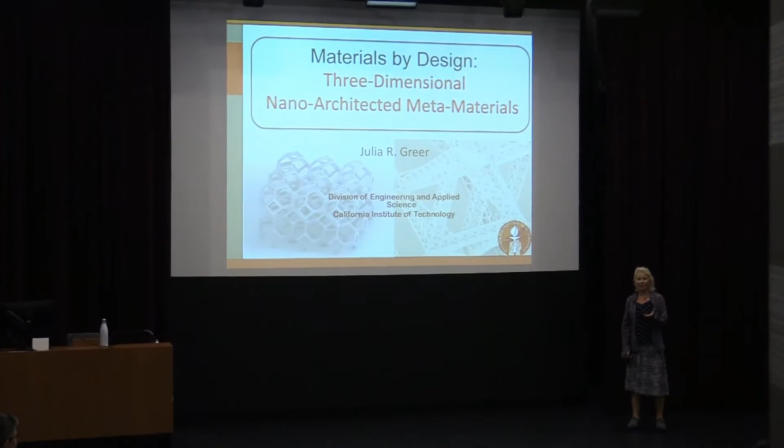You've been staring at this title for a while, so 'materials by design' probably makes sense, and then you look at the second part of the sentence, '3-dimensional nano-architected metamaterials,' and you're wondering, okay, I think maybe I understand each one of these words on its own, but why they belong in the same sentence might be a little less clear. So the goal for today's talk is to convey to you why it is, in fact, appropriate to put them all in the same sentence.

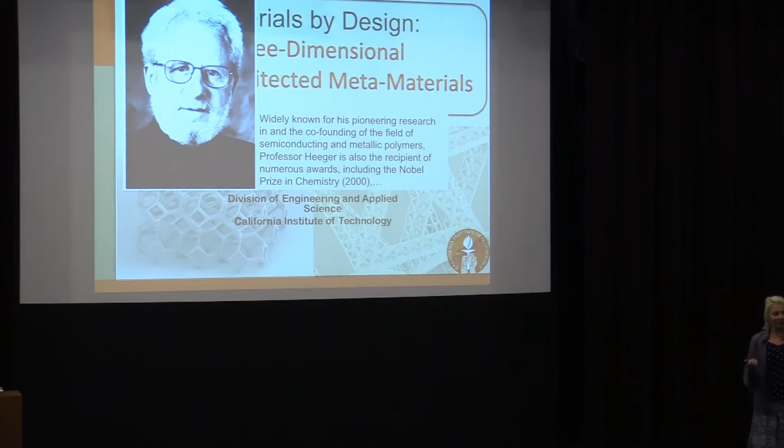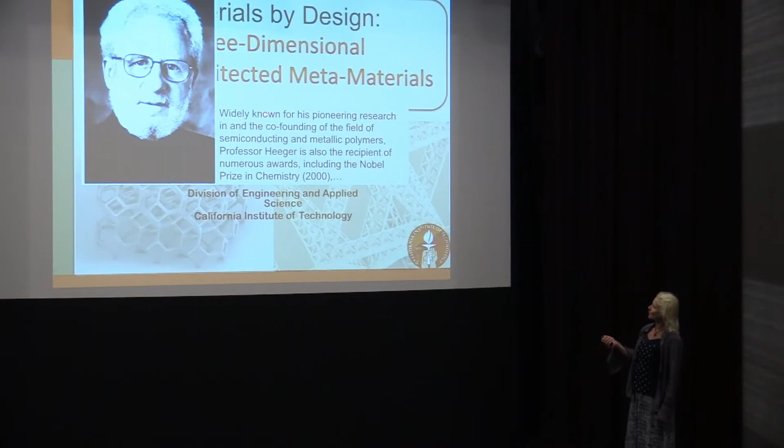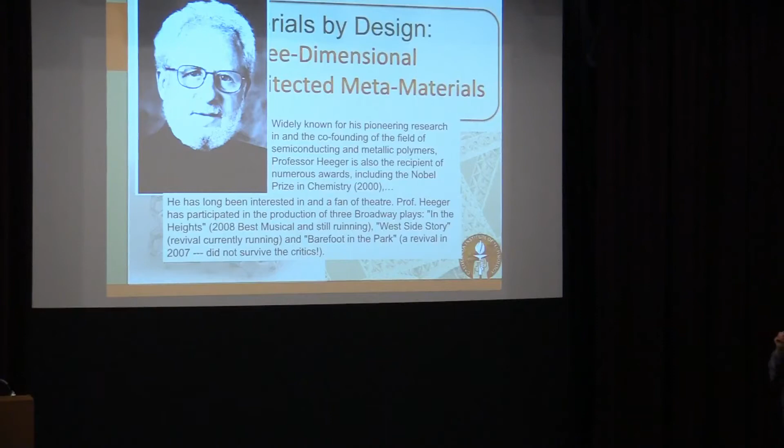I'm here because of receiving this award that Alan Heeger endowed. So what I'm showing you is a picture of Alan, and of course he's widely known for his pioneering research on various types of polymers. So I will tell you a lot of stories about polymers today. But the lesser known fact about him is that he's actually a huge theater fan, and if you love theater, you can see that there are all these plays that he's been in.

And so I'd like to begin, I guess, to motivate my talk by showing you this, inspired by this theater situation. So I also happen to have a theatrical play.

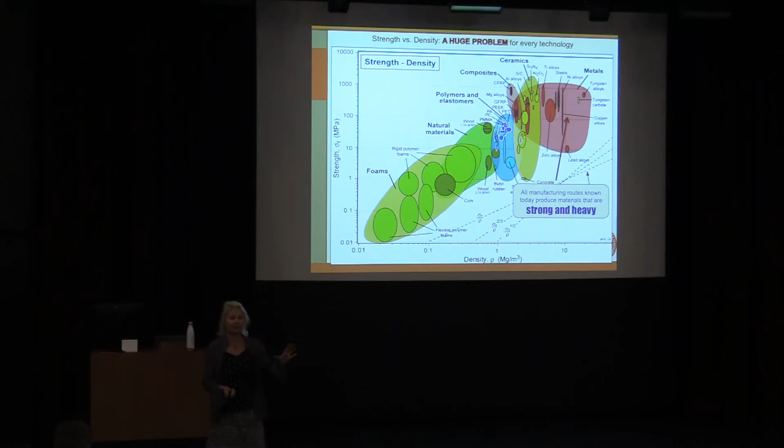Look at all these colorful domains. These represent all the materials that we know how to make today. What comes out right away is that we are very good at making materials that are simultaneously strong and heavy, or lightweight and weak. What we're not so good at is hitting the so-called white space, making materials that are relatively lightweight, at least the relative density is low, and mechanically resilient.

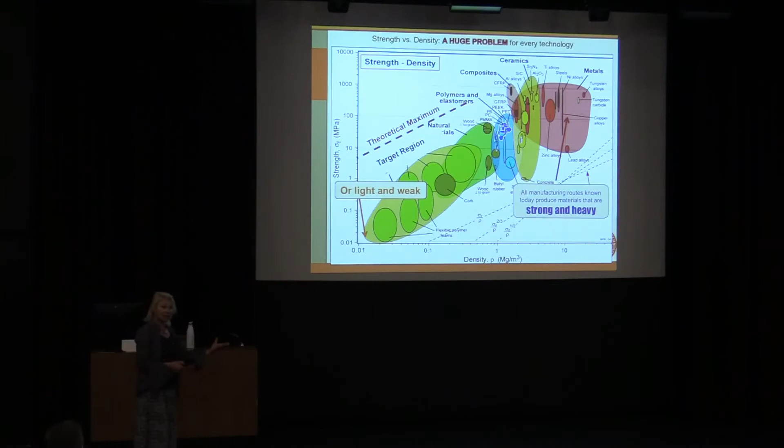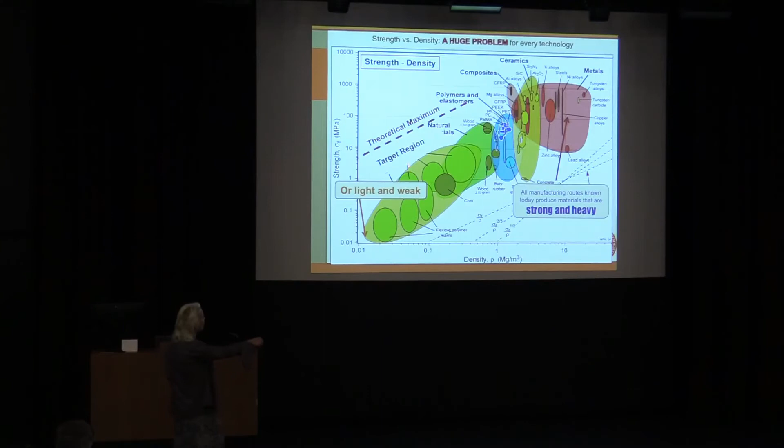So how do we hit this white space if everything that we know how to make today is already here? I'd like to point out that this is a log-log plot, so even a modest increment within this space already represents a substantial change. It's sufficient to get even over here to have an effect.

Well, the way we do it is we draw our inspiration from what exists today. When you look at the Great Pyramid of Giza, this is the largest stone man-made monument. You see that it stands about 150 meters tall, and it weighs nearly 6 million tons. So that's very, very heavy, right?

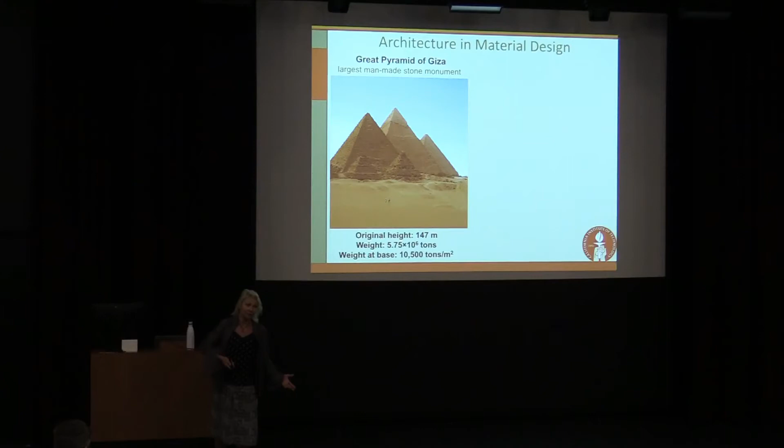Now, in contrast, the Eiffel Tower, and maybe some of you have been to some of these things, stands twice as tall, and weighs 1,000 times less. That's 3 orders of magnitude less. And it's just as mechanically resilient. They're both still standing. And I suspect there were a lot fewer slaves used in the construction of the Eiffel Tower.

So what that tells us is that we can make structures that are mechanically resilient without using quite so much material, right? So we began this research by collaborating with HRL, which is actually not too far away from here. And so what we made is a nickel microlattice.

What you're looking at is the world's most normal dandelion. There's nothing photoshopped about this picture. This microlattice is made out entirely of nickel. And you can see it's hardly perturbing the dandelion at all.

It's exceptionally lightweight. In fact, if I were to hold one of these in one hand, and a feather in the other, and release them at the same time, the feather would fall down faster. It's just exceptionally lightweight. But what we want is not just the lightweight, we want a combination of lightweight and strength.

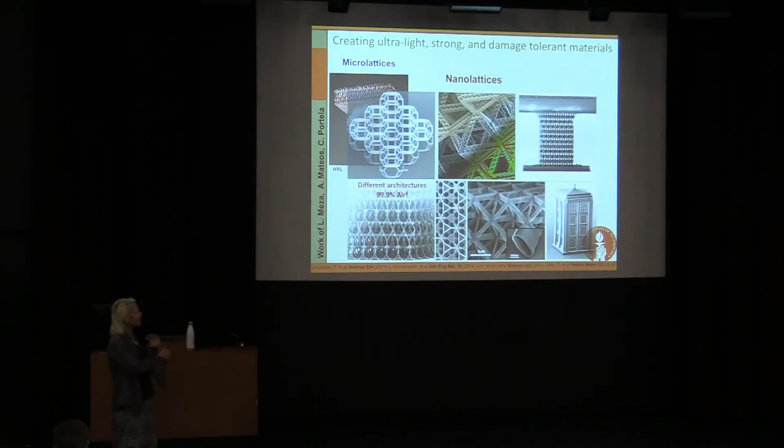And for that, we have to go down 3 orders of magnitude in dimensions. So what you're looking at are examples of nanolattices. These are all made by various graduate students in my group.

And what you can see, first of all, is that we're not limited in periodicity, and so this is a micro TARDIS, for those of you who are fans of Dr. Who. This is about 1,000th of your hair diameter—these are very small.

Now, when you look at the lattices, the obvious part that comes out is that they're cellular solids. So they're very porous, right? So very, very lightweight. But the less obvious part that may not emerge right away is that the tubes that comprise these woven architectures are hollow.

We're effectively constructing 3-dimensional interwoven networks of straws—very, very thin-walled cylinders—and the wall thickness here could be on the order of 5 to 10 nanometers. So this single material embodies every length scale, from some nanometers, just maybe 5 or 10, to hundreds of nanometers, to microns, which is the dimensions of the unit cell, to hundreds of microns, the dimensions of millimeters and centimeters.

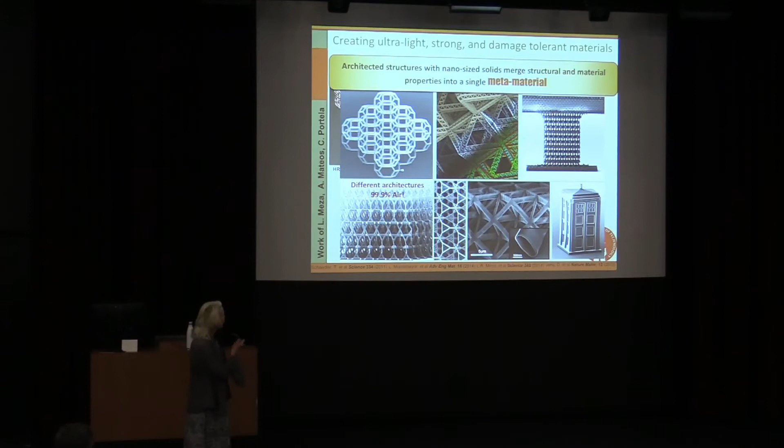And this is why it's appropriate to call them metamaterials, because at these very small length scales, nothing is independent of one another. They're not structures, and they're not materials—they're actually both. And so to illustrate this, I'd like to first of all prove to you that they are in fact very different, or that materials behave very differently at a nanoscale.

When you look at some typical metals—gold, silver, copper—so your earrings, those of us who wear earrings, we know gold and copper to be very malleable, right? Now, if you look at these metals in their single crystal form, and plot their strength as a function of size, you see this tremendous strengthening—again, a log plot. What that tells us is that if you take a chunk of gold, which we know to be very malleable, and reduce its dimensions to 200 or 100 nanometers, it becomes the strongest steel. Wow, well that's a lot of strengthening, right?

But now, take exactly the same metals—gold, platinum, copper, nickel—and deposit them using a different technique. All of us here do nanofab of some sort.

If you use CVD or sputtering or anything else and deposit them as a thin film, all of a sudden this effect is reversed. It's a more modest size effect. It's not a log plot, but smaller is now weaker. What gives rise to that is that the atomic level architecture is different, because now this is nanocrystalline versus single crystalline. So now you have this powerful tuning knob.

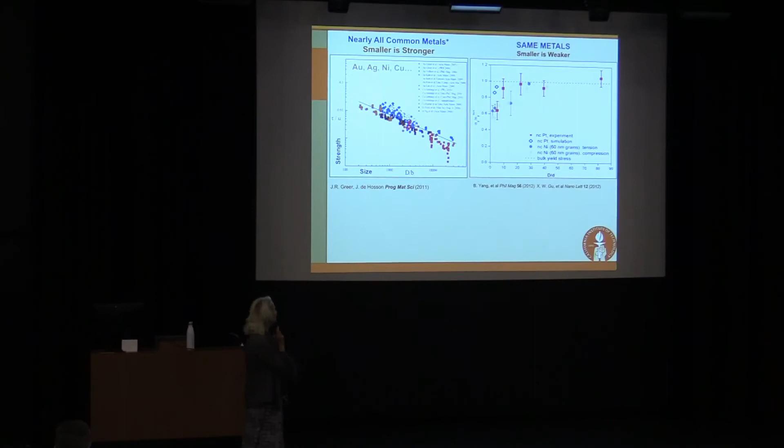You can tune the strength based on the material's dimensions and microstructure. But the size effect is even more powerful than that. So what happens if you pull or try to bend a glass rod? This is not a rhetorical question. What happens if you pull on a glass rod? It'll shatter and break, right? Glass is not supposed to be extendable. So this is a special kind of glass. This is a metallic glass.

It's about 150 nanometers in diameter, and we're going to pull at it. So 150 nanometers in diameter, watch this region right here. We're extending the glass, and it's extending and extending, and look what it's doing. It's forming a neck, and it's actually extending by more than 100% before failure. Glasses are not supposed to do that, right?

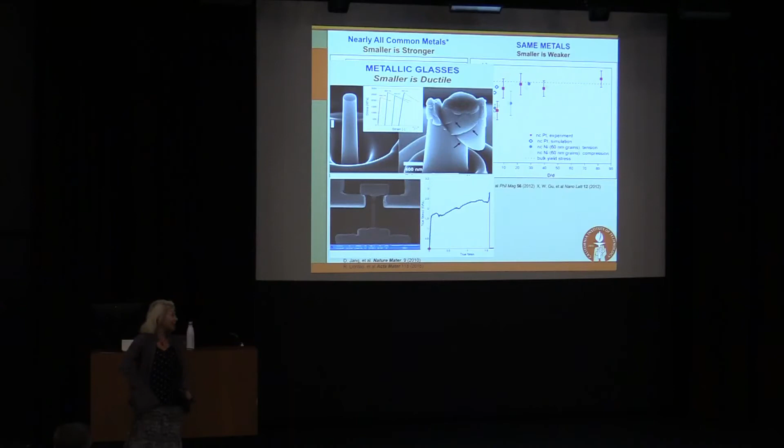I'd like to show you one last example. This is a ceramic nanotruss, and this is a single unit cell. We're going to compress it now, and watch what happens to these outer beams. They're slightly elliptical, so they're bending. Imagine bending a piece of chalk—you're not going to be able to, it'll snap. But this ceramic, this is ceramic titanium nitride.

This nitride nanolattice—first of all, each beam is deflecting so much that the internal stress here is something like 1.7 GPa. Ceramics are not supposed to stay intact when you apply 1.7 GPa of tension onto them, but these are staying intact over multiple cycles. So what that tells us is this: sometimes materials get stronger, sometimes they become weaker, and some other times you can suppress brittle failure. All of these beneficial phenomena emerge only at the nanoscale.

So the big question we had was, how do we harness this phenomenon? Can we harness this phenomenon and then proliferate it into the larger scales to make macro-sized materials?

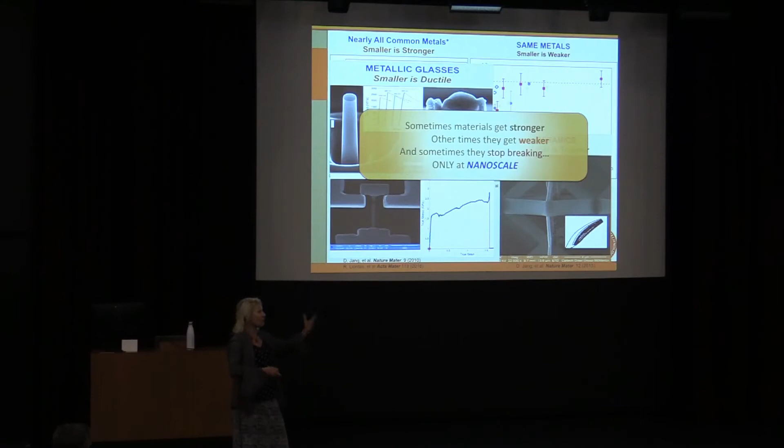Just a few words on the architected materials. Instead of using UV lithography, which I think is what many people use here to define two-dimensional features, we use something called two-photon lithography, using a less powerful laser. We flood the space with a lot of photons, and the constructive interference of two photons in a single laser pulse produces a sufficient amount of power to cross-link the polymer in that voxel. So what you see here is this tiny little voxel, which allows us to eliminate these diffractive cones of the UV light. Less powerful laser, but a lot more photons.

This two-photon lithography technique allows us to sculpt whatever complex shape we want. So complexity comes for free—it doesn't have to be periodic, it doesn't have to be any specific shape. I can write a nano version of each one of you in the audience using this technique.

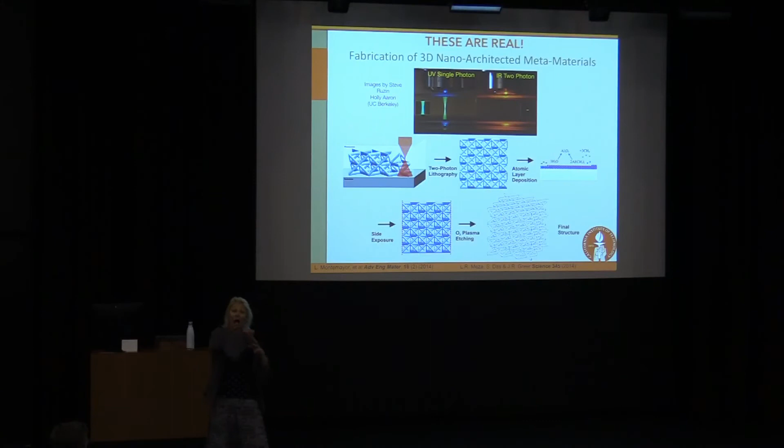After we write the scaffold using this technique, we actually coat it with the material we are interested in—maybe not necessarily polymers, but it could be a ceramic, a glass, a semiconductor, or a metal. Usually we make our samples in these cube form factors, and we expose some of the faces of the cube, which allows the oxygen plasma to access the tubes and the material inside. So we etch out this scaffold that was so painstakingly written, and what we end up with is a replica, the hollow tube replica of what we had designed. That's what allows the materials to be so rich.

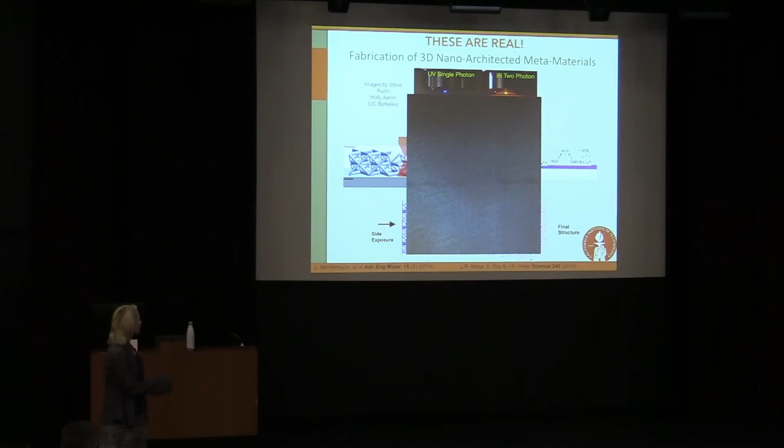Now here's the real-time process of writing using digital nano-architected instruments. You can see that we first define the field and then we start writing, and this is real time. It's a pretty fast process, but not exactly manufacturing.

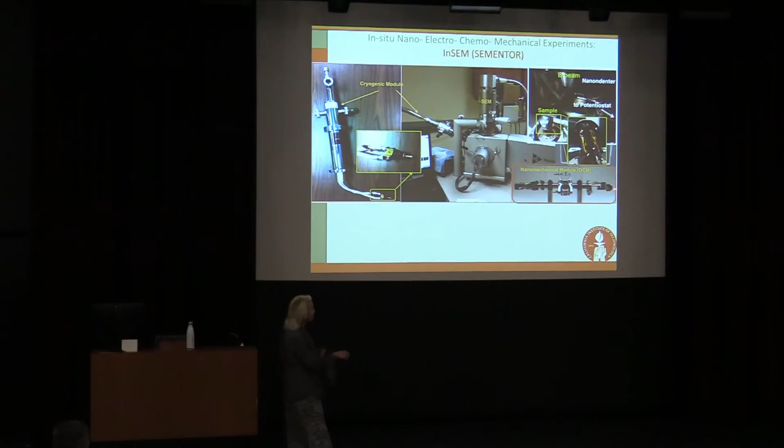Everything we make is very small. I'd love for it to be bigger, and maybe somebody here could help us scale this. But because everything is so small, we have to do a lot of our experiments in this special instrument. Without all these whistles and bells, it would just be an SEM chamber, a scanning electron microscope. But now we have a nano-mechanical module which allows us to use all these different inquisition devices. We can do tension, compression, and a lot of different kinds of mechanical perturbation that allows us to study these materials and how they deform at multiple length scales.

So here's a big question. This is an architecture, all made out of alumina. So how many of you have done ALD, atomic layer deposition?

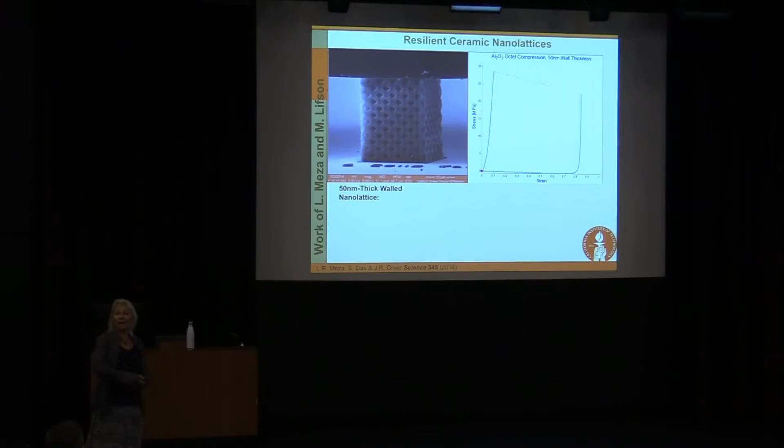One, two, all right, not a lot.

The ALD community is very proud of what they do, and they'll tell you, oh yeah, we can deposit anything as long as it's alumina. So this is alumina architecture, with a wall thickness of 50 nanometers. Imagine your coffee mug with a severe case of osteoporosis, and we're going to compress it, we're going to crush it. So what do you think is going to happen?

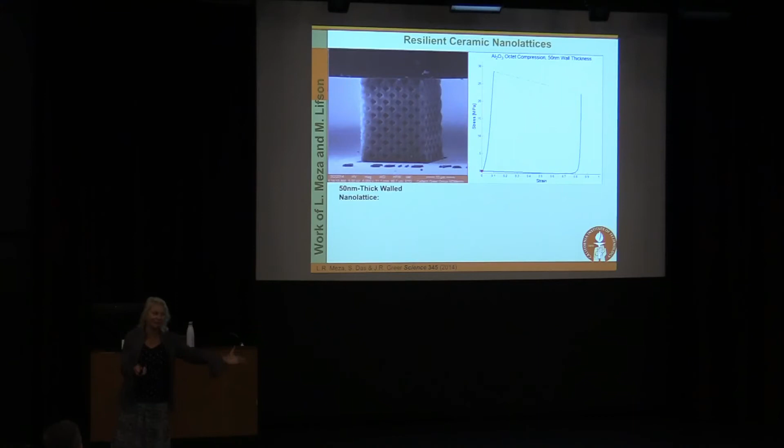Very brittle, very thin wall, very porous. It's going to crush it, right? And we're going to destroy it. So here we are, compressing it in that instrument I just showed you. Here's the stress-strain, and sure enough, it loads up, and it crushes and dies, catastrophic, bad news for this guy. We have a little nano cemetery in our instrument.

And there is actually one good thing. Look at the stress level here—it exceeds 25 MPa. Something that's 99.9% air shouldn't have anything measured in mega units, it could be kilopascals, it could be pascals. So this is still very strong. We're not sacrificing strength. Okay, so we crushed it, but it's still very strong.

So we repeat this experiment on something that should crush and die even more readily. This is exactly the same architecture, the same process, everything is exactly the same, but now we reduce the wall thickness by a factor of 5, from 50 down to 10 nanometers. Now watch what happens.

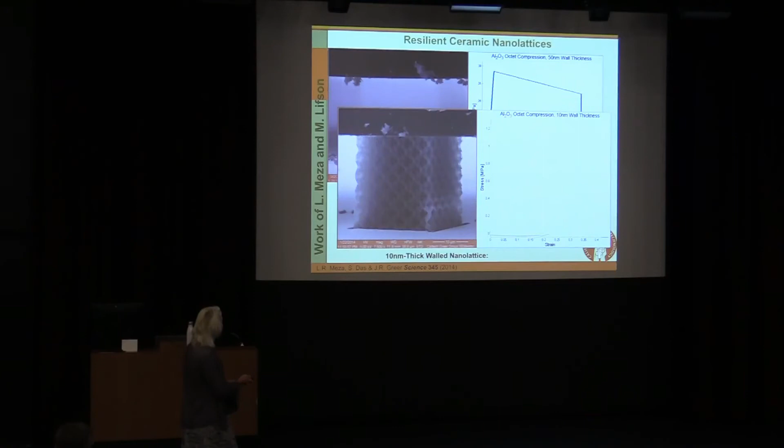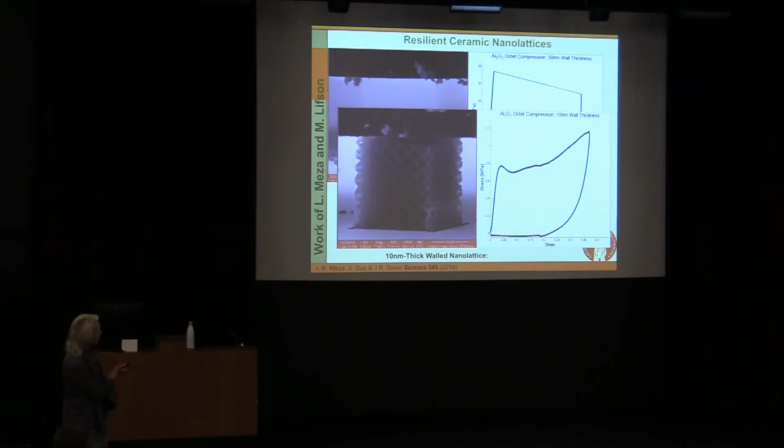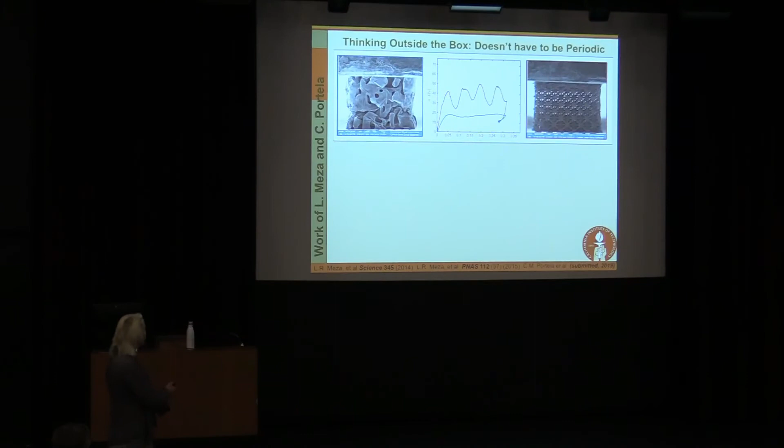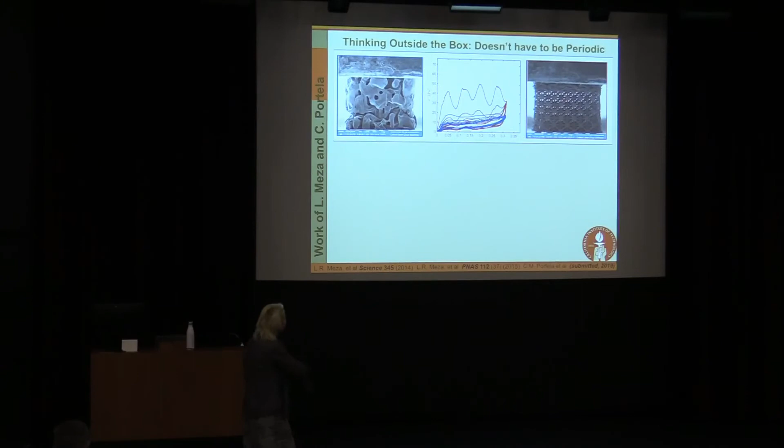Now this behavior actually prevails in very complex geometries and under very complex loading states. Look at this—it's a bicontinuous surface, we call it a nano-labyrinthine type surface. There are no beams here, this is all a bicontinuous surface. This one is aperiodic, and what you can see is that it's recovering over multiple cycles, with quite a bit of energy storage and energy absorption capability.

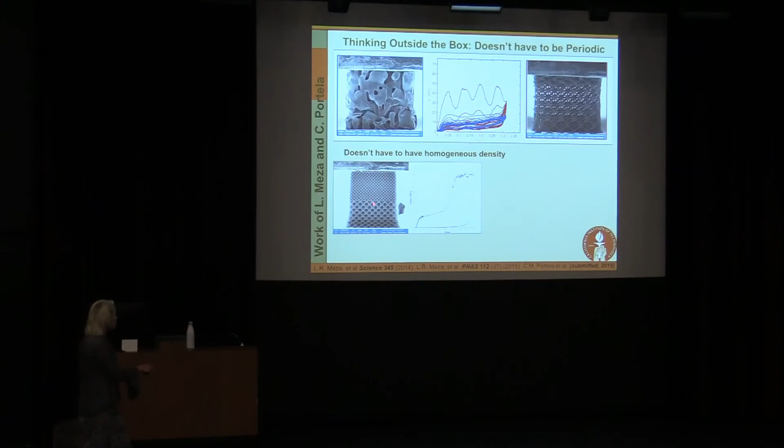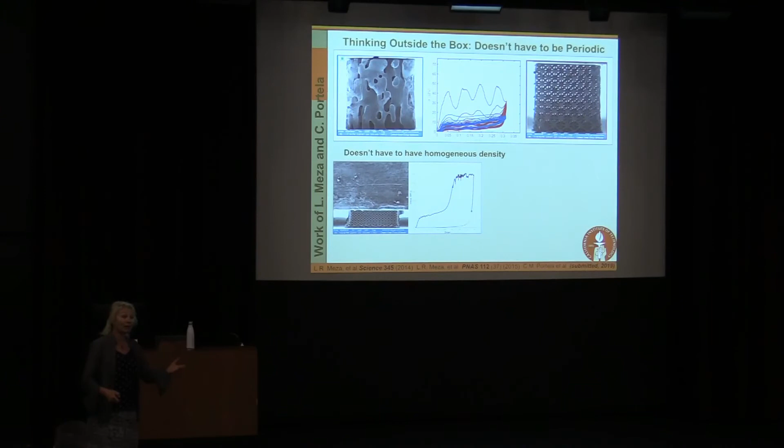You can see that the density doesn't have to be homogeneous. In fact, we can prescribe different density regimes. Watch what happens when we compress this one. This is the lighter, less dense region, and that's the first region being compressed. This part doesn't even know it's being subjected to any mechanical loading. Only after we've fully densified and compressed the bottom part does this become the load-bearing element. So now you can prescribe different architecture and different trajectories of how and where your material is going to deform.

So, of course, we wanted to know why this happens. It turns out that hollow beams, which are the key element in most of these architectures, undergo a process called shell buckling—an elastic instability that might be the mechanism allowing the structures to recover.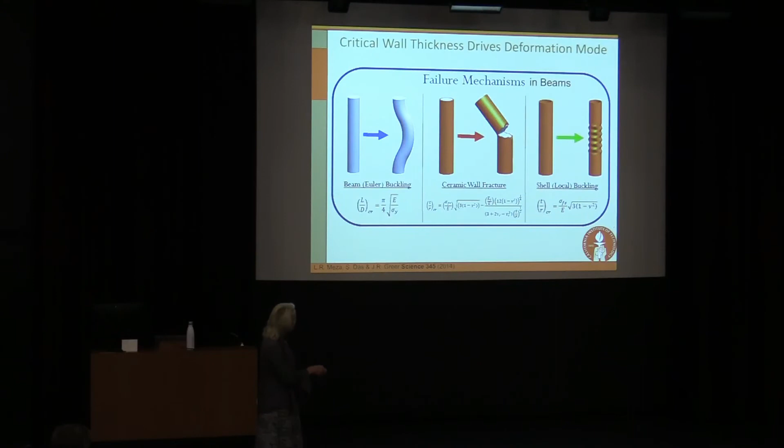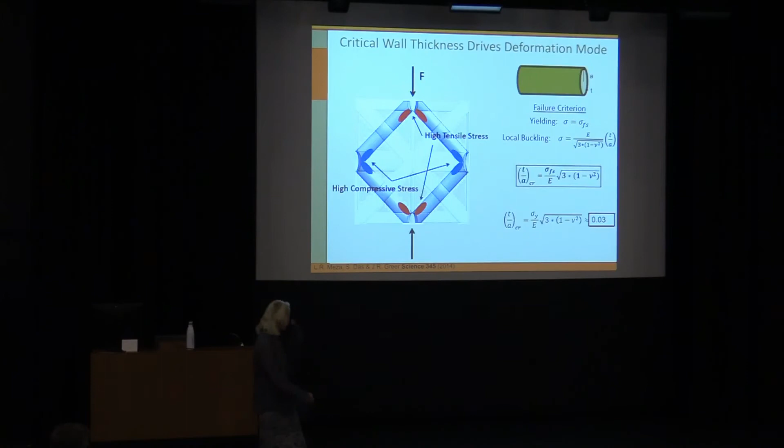It turns out that for these kinds of deformation processes, you need to meet a particular criterion. If you have a beam whose thickness is T and whose radius is A, and you compress it, for it to undergo shell buckling prior to failure, you need a certain T over A critical ratio. For the alumina, that critical ratio turns out to be about 0.03. So maybe that explains the recoverability.

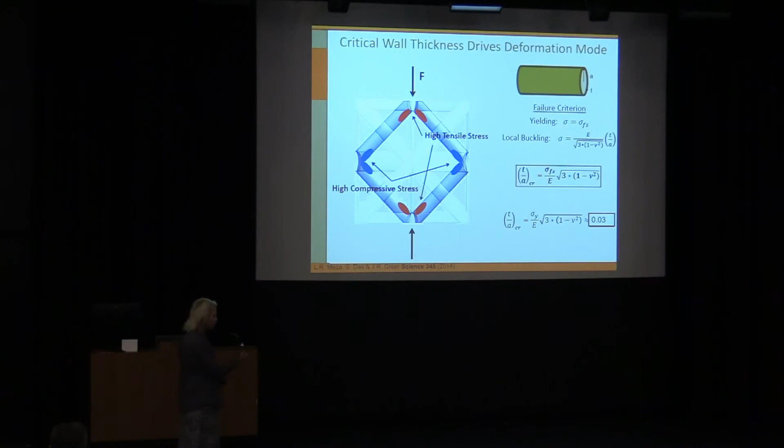Well, sure enough, let's look at that. For the 10 nanometer wall thickness, that ratio is below the critical ratio, and we can see that for various unit cells, your structure always recovers—so that seems consistent. As we increase the wall thickness and get to the critical ratio and then deviate further from it, our deformation becomes much more stochastic, much more jerky, and obviously this guy doesn't know how to try to recover.

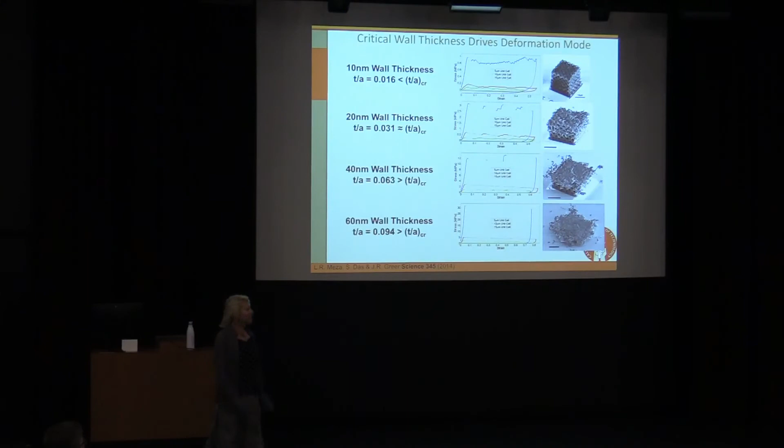So the answer lies in mechanics. What that tells us is that if we were to build a building out of big tubes whose wall thickness is 10 centimeters and whose radius is 3 meters, and we preserve the T over A ratio, and we build a building like this, some giant could come and step on it, and it'll just spring right back after, right?

Would this ever happen? Okay, girls smiling, this is good. Most of you are awake, this is good. But this would never happen, right?

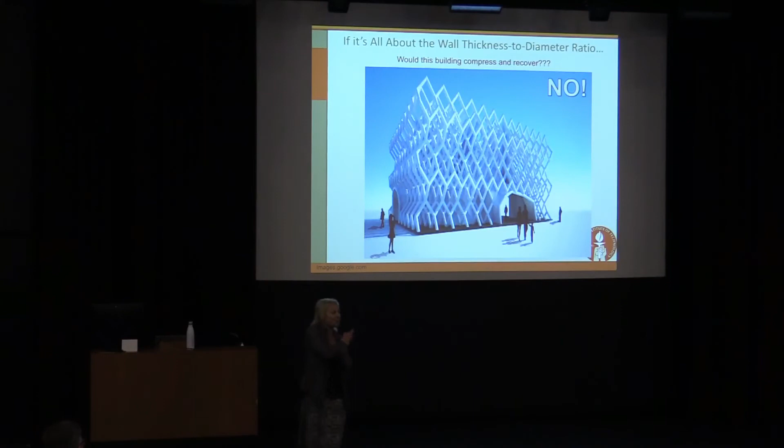Why not? How does this size effect manifest itself here? Because it's not explicit, right? It's all about T over A. Mechanics tells us as long as the T over A is preserved, we should be good to go. Why would this never ever happen at the macro scale? And why is it that we're benefiting from the nano-sized effect there?

Any ideas from students, possibly? These are other students. I heard something. What? Buckling. Buckling does not happen, that's the problem. Why would that not happen? What would happen before buckling?

Yield. This is concrete. This is concrete, like serious building material.

What is yielding in a brittle big concrete? You're right, but how does yielding happen in a brittle material? It just fractures. That's exactly right.

So there's so many, it's the defects. There are so many defects, micro voids, micro flaws, that when we globally apply any kind of stress, the local stresses on all these defects will be so much higher than the fracture strength. The material will always fracture locally before ever getting a chance to buckle as a structure. So this material doesn't ever get to experience any kind of buckling because of defects.

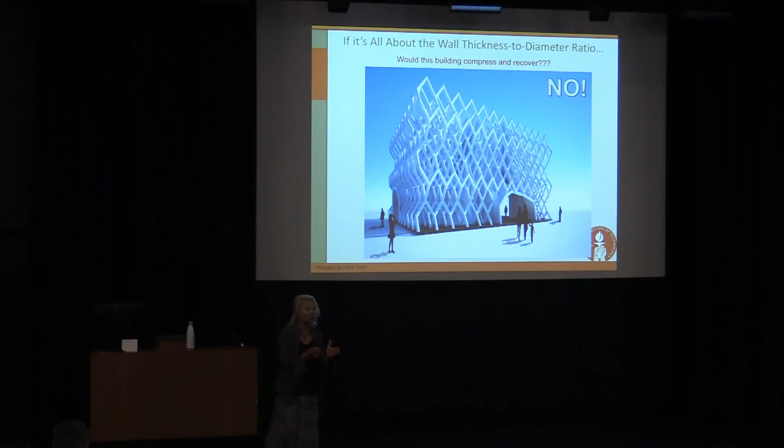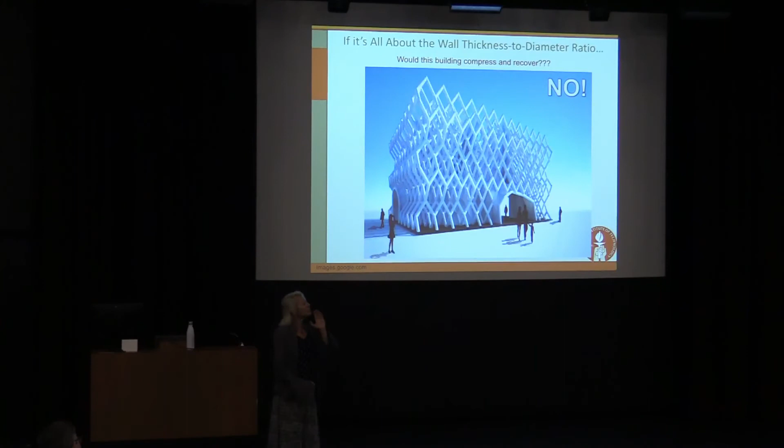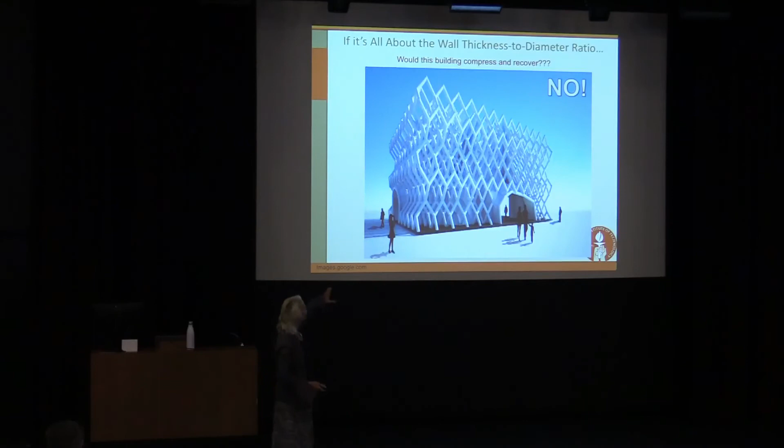So what that teaches us is that the size effect manifests itself here by our ability to make much more ideal, much more perfect materials when they're only 10 nanometers thick, and you can fill up the whole room with them. And when you make something that's much thicker, that's not the case.

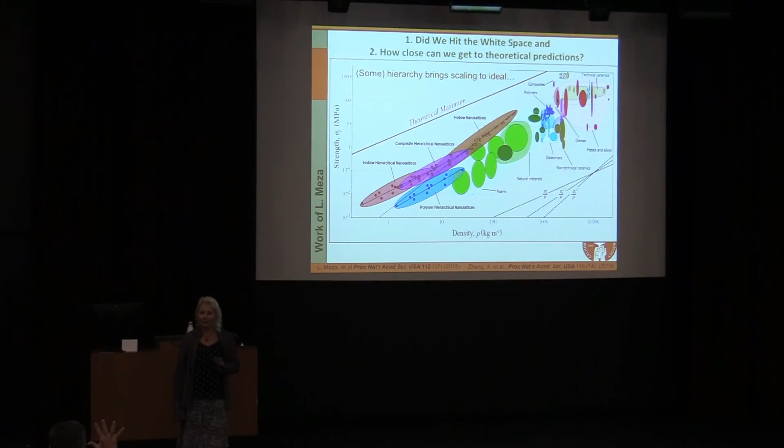I only have 5 minutes left, oh my God. Saying this scaling is really far from ideal.

And then you're wondering about this, well, it turns out that it's all about the nodes. So these nodes really kill us. So we figured out that maybe what we could do is create some architectures that don't have any nodes.

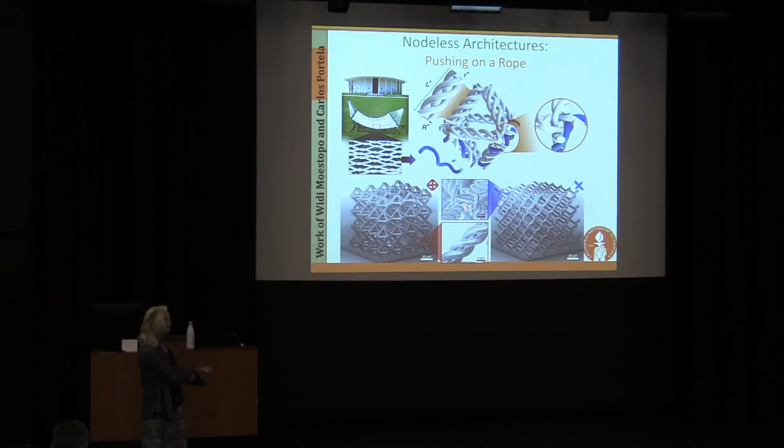And so what I'm showing you here is some of our very recent work. This is my new student, Widi, who's creating these woven architectures. You can see they don't have any nodes. And so what we're effectively doing is, look, we're pushing and pulling on a rope. So we effectively create the net.

And so you can see we can actually extend them. So far I've only shown you compressive results, but these are actually tensile results. And then now immediately go into compression. And so we can push and pull on them.

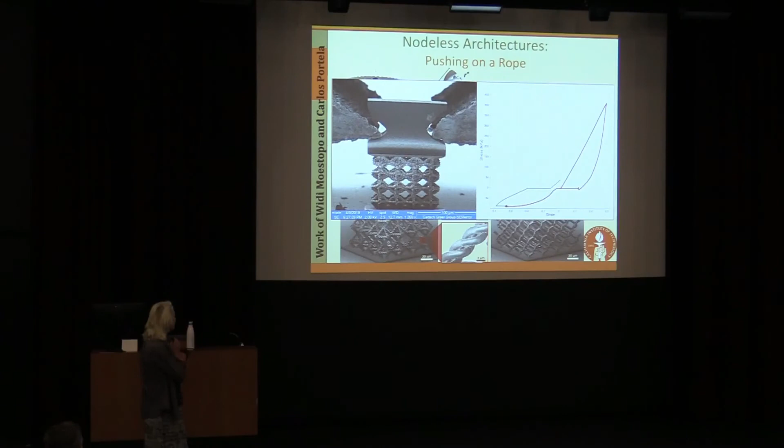My colleague Dave Barr used to tell us all the time, don't ever push on a rope. Well, it turns out that when you create nano ropes, you can actually push and pull on ropes, and they work pretty well.

Okay, that's just to show you that they're actually quite a bit more extendable than anything that's not woven. So we were encouraged by that as well.

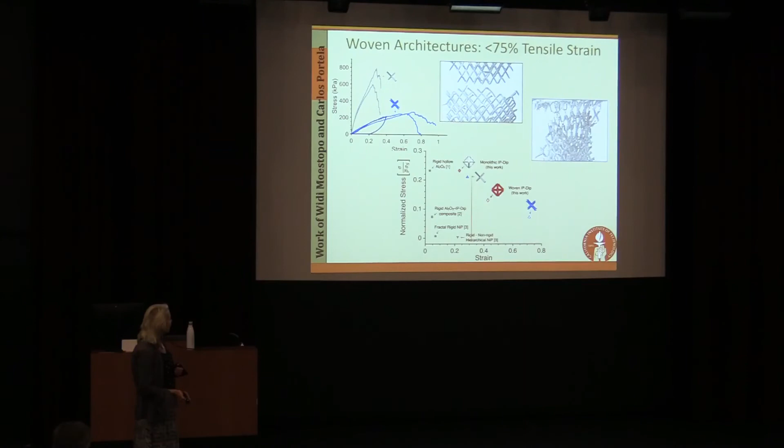Now, this tensile capability allows us to study fracture of these materials and understand how you think of fracture in something that's fundamentally made of flaws, right? This material is continuous when you zoom out, but it's very discrete when you zoom in because it's all made out of tubes.

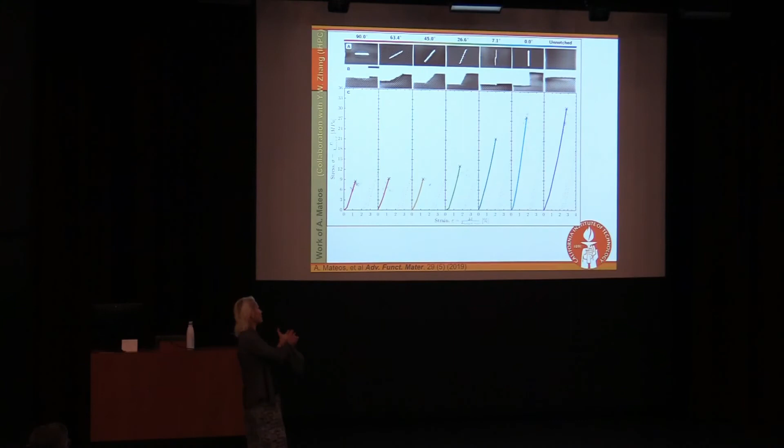So here's what we learned: they always fail orthogonally to the loading direction, no matter which way the defect is oriented. That gives you a certain amount of comfort because you can put in a notch or a defect in any orientation that you want, and it always fractures orthogonally to the loading direction.

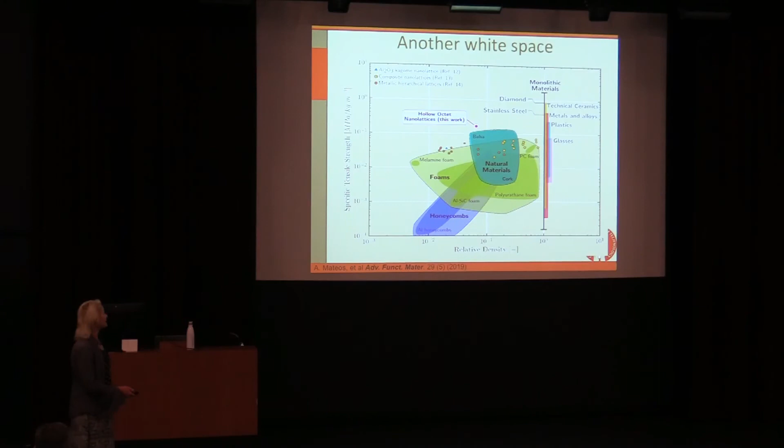By doing this, we learned that we can actually hit another white space. These materials don't ever cease to surprise us. Now, this is doing fracture the right way. That was not the best way to do fracture. So now I have a summer student who figured out that this is how you should really do fracture.

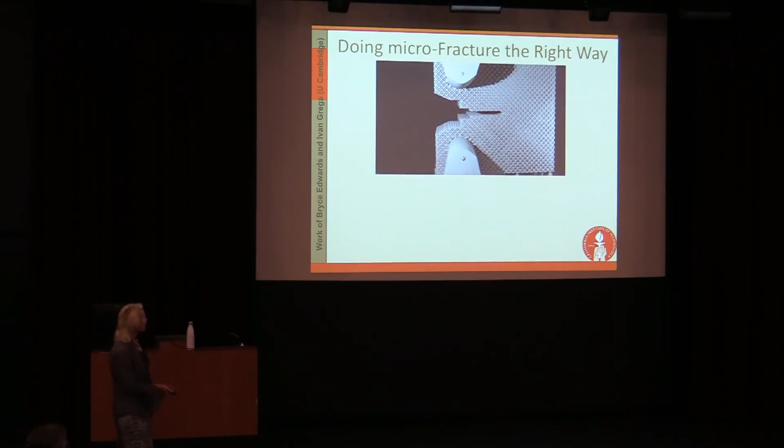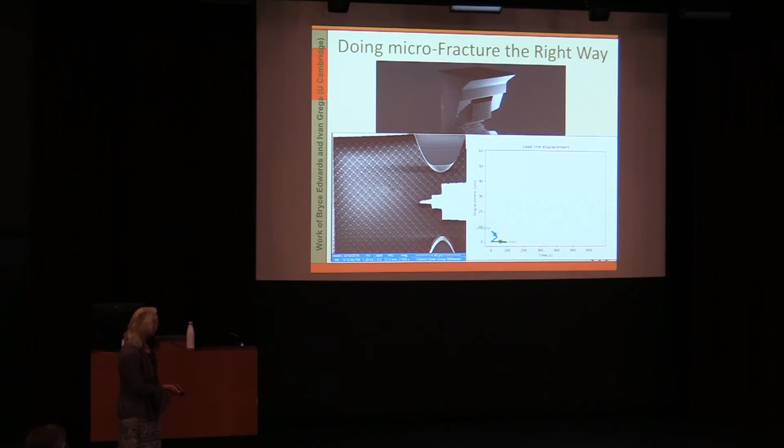The way you do it is you actually create single edge notched specimens, so that you can apply the load homogeneously. These are the kinds of geometries that they're testing. And sure enough, of course, they've already made it. This is the thing about Cambridge—their students are kind of brilliant. And so they really figured this out.

They're able to track the crack opening, the crack trajectory, and the crack propagation here. And so we're able to track the displacement and quantitate structural toughness of these materials.

And this is usually when I take the dramatic pause when I have 5 minutes left.

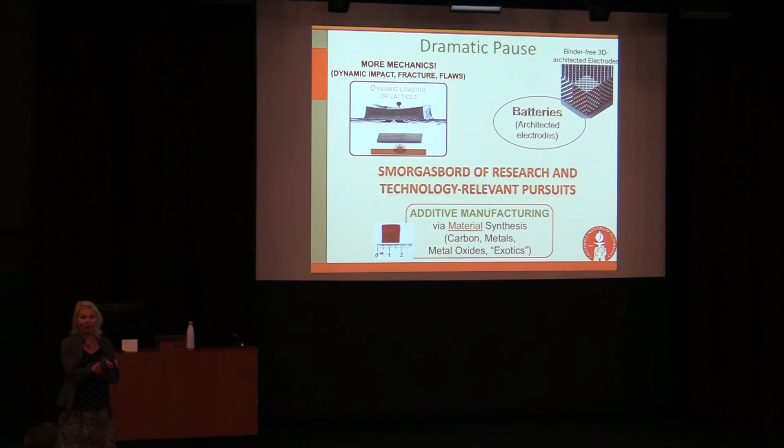Because this is a lot of pictures and videos and mechanics that I showed you, but many of you probably don't care about mechanics. Usually I ask my audience to choose one of these topics because I can't tell you everything. We work a lot on additive manufacturing, we work a lot on energy storage, we work a lot on mechanics, but I don't have time to tell you any of these stories really. So I'm just going to share with you some of the highlights of what we learned that's exciting to us in the last little bit.

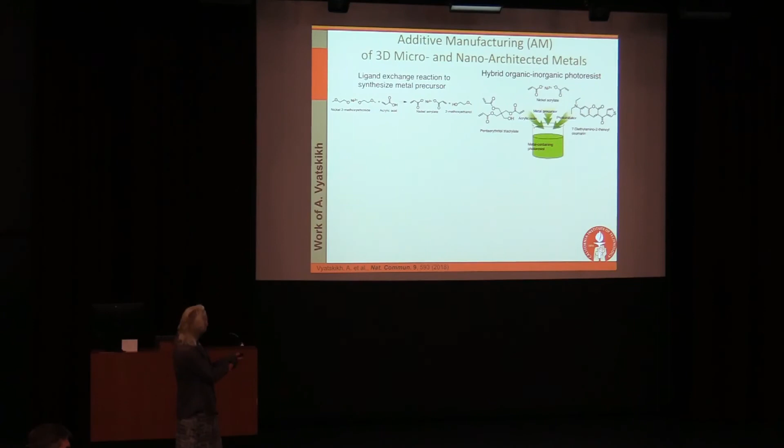So additive manufacturing. Are people interested in additive manufacturing here? Seems like this would be functional material. So what we've discovered is that you can actually trap various ions in the resin.

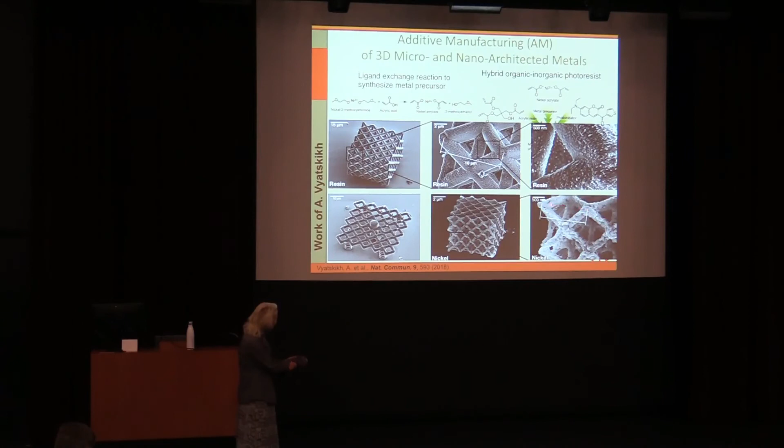And so you can create an acrylic-based resist to start creating these architectures out of metals, so that we're not only limited to polymers. What my student Andre was able to show is that you can make a nickel-containing resin and then pyrolyze it, which is a fancy word for burning. When you burn off all the organics, you end up with an additively manufactured nickel material. The unit cell size here is only 2 microns, and each individual beam is less than 500 nanometers. That's not something that additive manufacturing people have accomplished to this point.

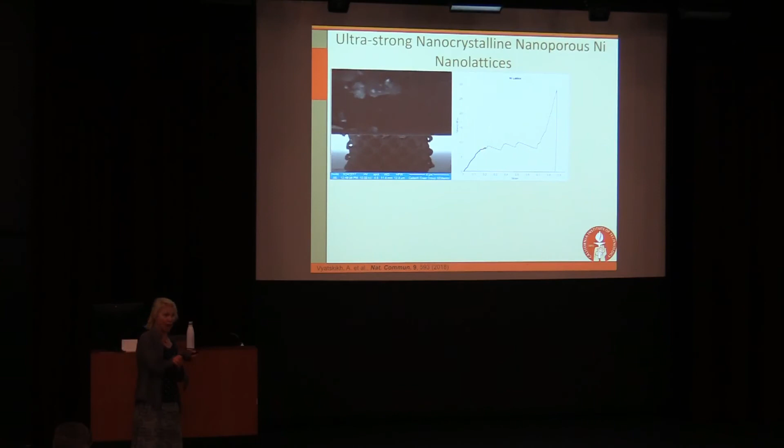So here's some legitimate mechanical data to show you it is in fact nickel. It should be really crappy nickel—it's very nanocrystalline, very nanoporous, not entirely pure—but look how much better it does than everything else today.

So now for metals, we're moving on to metal oxides, and my student Daryl figured out that you can do hydrogel-based synthesis, so no more acrylic stuff. This is actually all water-based, all aqueous, and you can use metal salts. This is a way to make zinc oxide, for example, using this hydrogel-based synthesis.

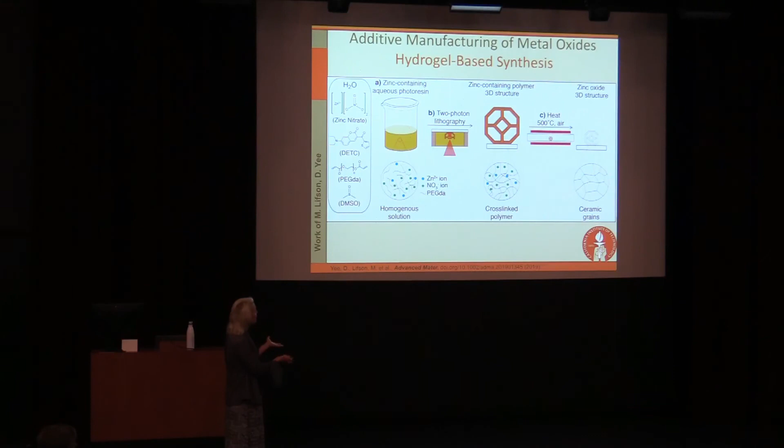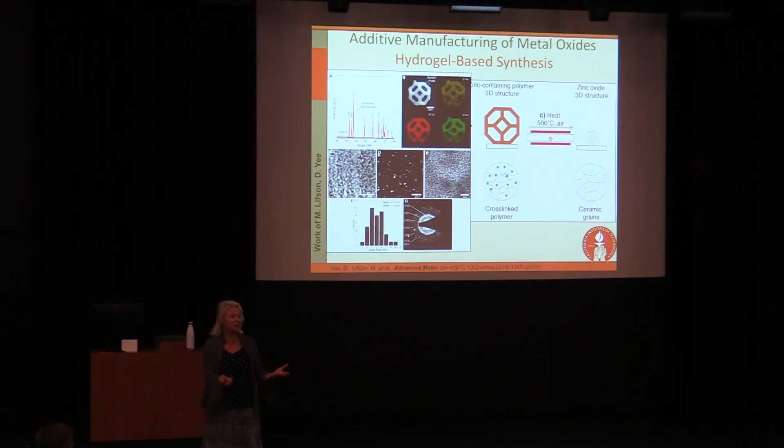And so legitimately, zinc oxide—what do we know about zinc oxide? What's the most prominent property of zinc oxide? Piezoelectric, right? So here's what we discovered: when you compress it, this is the zinc oxide part, it undergoes a voltage drop. So it preserves its piezoelectricity, and here's the unexpected part—if you look, those of you who speak TEM, it's very, very nanocrystalline.

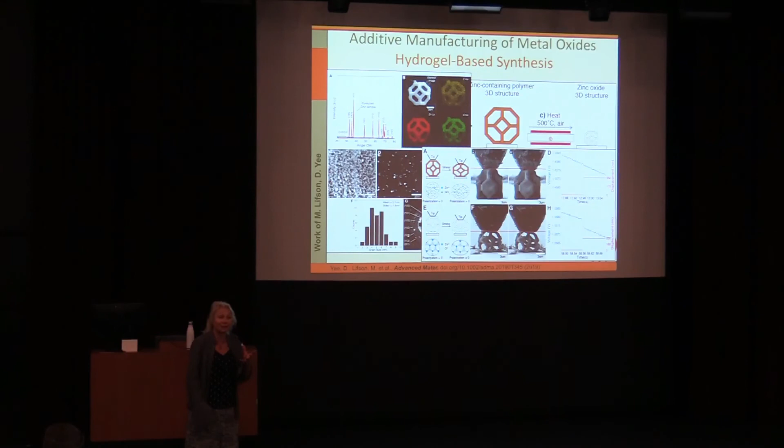Piezoelectricity is exhibited by single crystalline zinc oxide, right? Because we're creating a field by virtue of the domain separation. So when you create the electric field in a single crystal—but these are all nanocrystals, so they should all cancel out. Well, it turns out we actually understand now why this is happening. Even though this is nanocrystalline, we're still getting the piezoelectric response. Now you can make very complex architectures that still exhibit piezoelectricity.

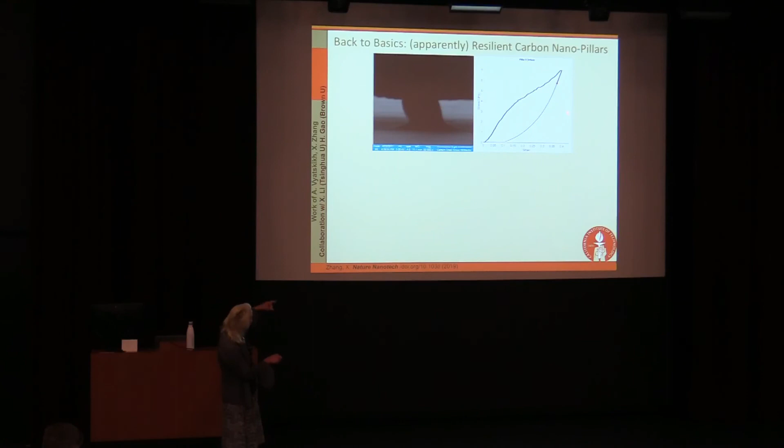So carbon at these length scales thinks that it's rubber. Look at the scale here—this is 7 GPa, very, very small. So that's just to show you that at the nanoscale, even carbon is different. And actually, we were pretty excited that this work just made it onto the cover of Nature Nanotech. It's a collaboration with our collaborators at Tsinghua University, Huajian Gao and Xiaoyan Li.

Just to finish things up, one last one, I promise. My students are really excited about batteries—additive manufacturing of batteries and how do we put them together. They need some electrochemically reconfigurable materials. So this is a tetragonal nanolattice, microlattice actually, and it's an anode. It's a silicon nanoribbon that's wrapped around the semiconductor. And all we're going to do now is lithiate it.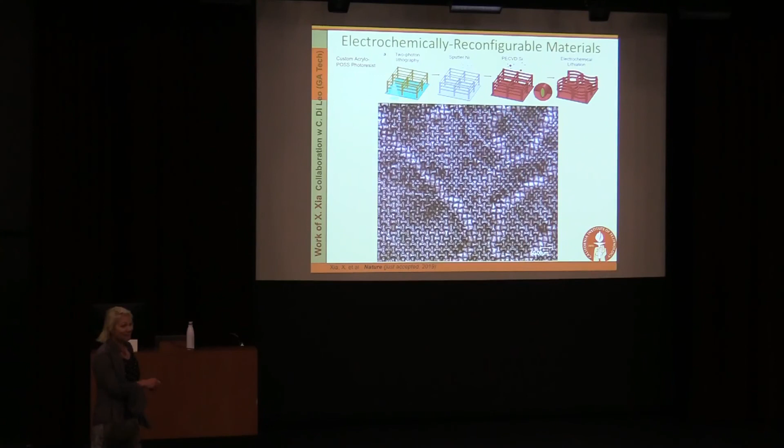Okay, so look at it from the top, and we're just lithiating it. Watch what happens—this is a silicon anode. It's creating this random-shaped buckle pattern. So what's happening is that we're going from tetragonal into these sinusoidal-like patterns. And when that happens—it is a legitimate battery, just to show you—look, there's the specific capacity, there's the CV cycling diagram, there's the voltage profile. So it's a legitimate battery.

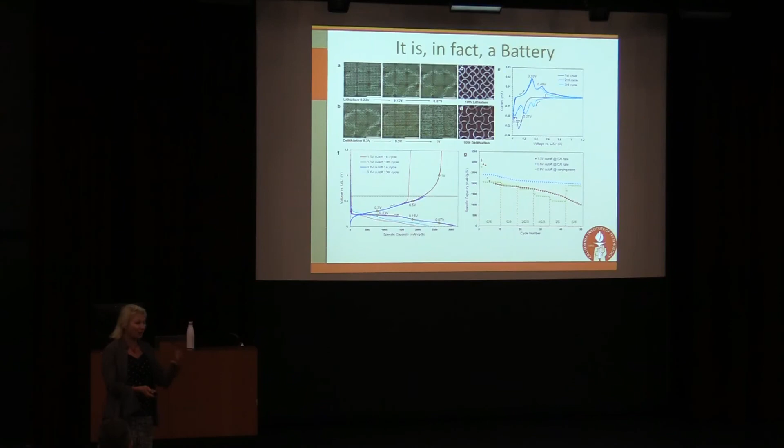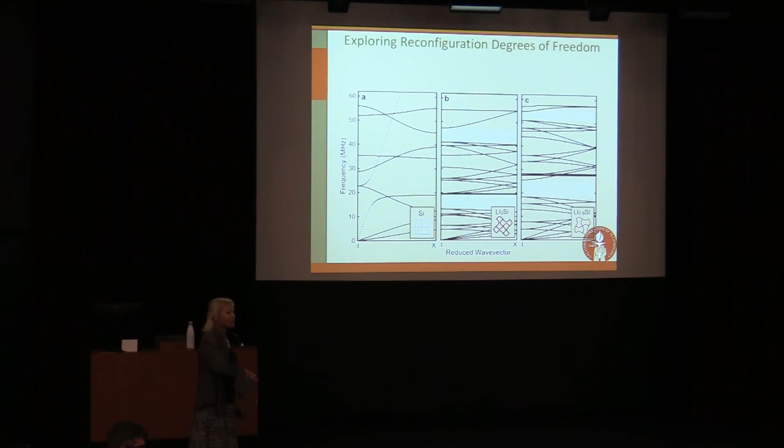And so it's accommodating the 300% lithiation volumetric expansion with these buffers. You can actually program the domains and program these defects in such a way that you can prescribe them and make this buckling appear so you can induce phononic band gaps. And you can take this—forget the battery—you can start manipulating these materials as reconfigurable. You can see that you can activate different degrees of freedom: you can bend, you can rotate, you can do all these things.

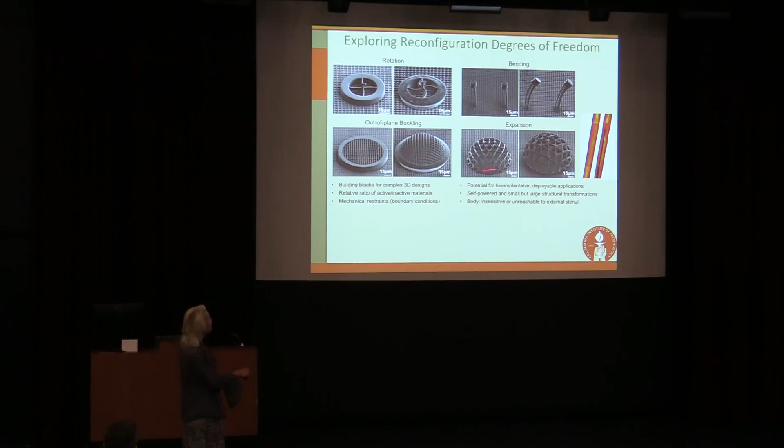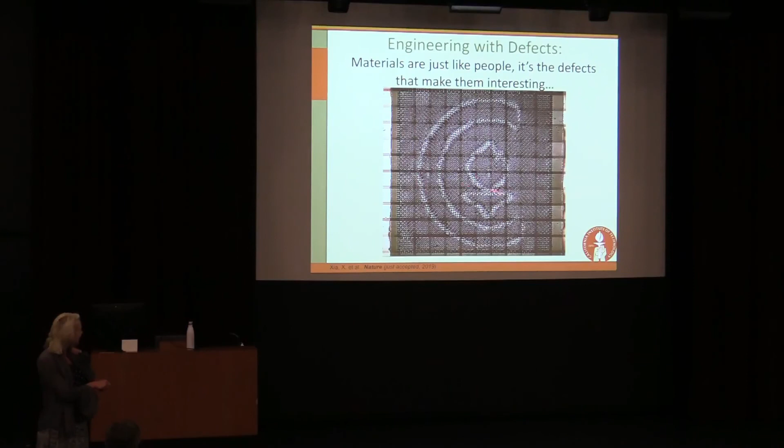And when you learn about defects—see, materials are just like people, it's the defects really that make them interesting. So when you're able to understand the defects, you can program them. Look at one of these tetragonal microlattices—now my student Xiaoxing is lithiating it, and lithiating it, and lithiating it, and this is the defect pattern that we pre-programmed. You can perhaps see the resemblance here with my little logo.

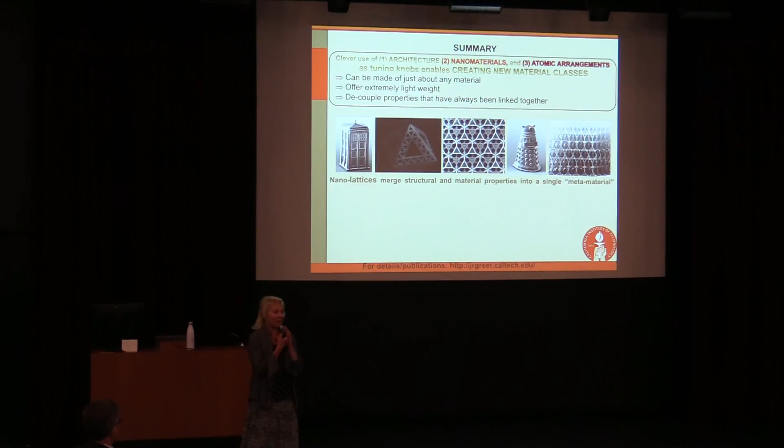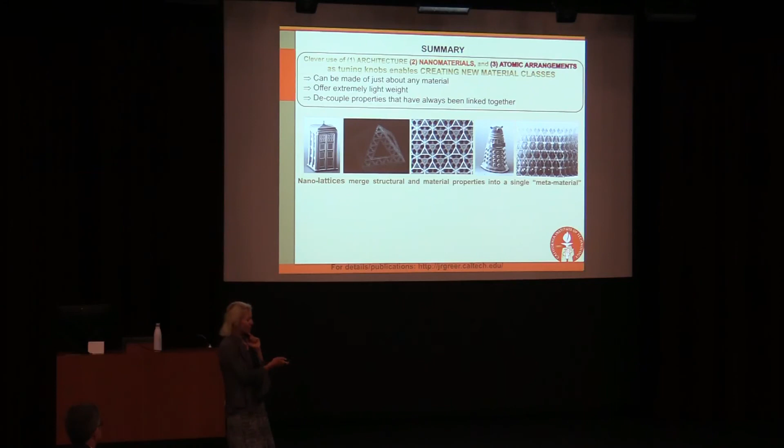So this is the end of my talk, and if you walk out of here thinking she showed us a lot of really crazy architectures and I don't remember any of it, please remember just 3 things: if you're clever about your atomic level microstructure—whether it's amorphous or single crystal or whatever your material is—the architecture of your material, and how it responds to this size effect, you can create entirely new classes of materials. The reason why we would want to do that is so our children live in a world where there are no hearing aids—you can just write the bone, the cochlear bone, and put it directly in the ear.

Our iPhone 83 will not need to be recharged for about a year. The balloons will be, of course, helium-free because we can evacuate the air—the vacuum is lighter than air. The Christmas ornaments will never break. And this is our latest pursuit—perhaps you had some of these outside, right, brownie? So we're now making chocolate nanolattices, which are 100% taste, 99.9% air, and 0.1% calories.